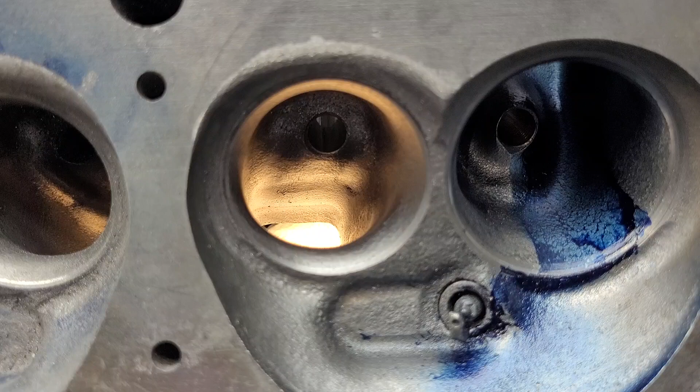Alright guys, this was actually supposed to be on the last video, but the pause button got me, so it didn't make it. This is the bowl ratio with the exhaust. You can see there's not nearly as much overhang as, let's say, the fin port has got.

So the bowl ratio has been opened, and it was nice what happened when you open up the bowl ratio. You can actually give it a bit of a short side radius, which is a big help, because this port was down quite a bit as far as CFM from the rectangular port. This is the quicky port, which has got the trapezoid shape. If you look all the way down.

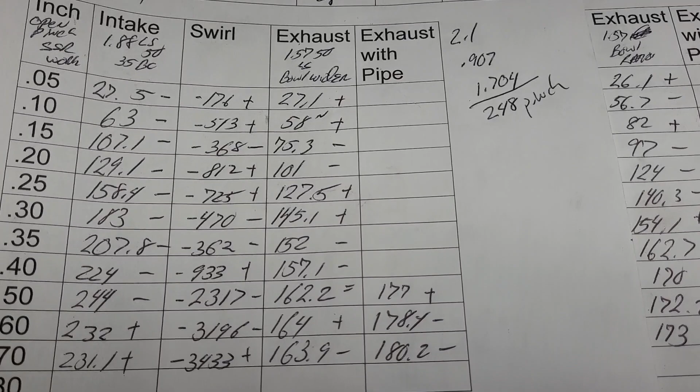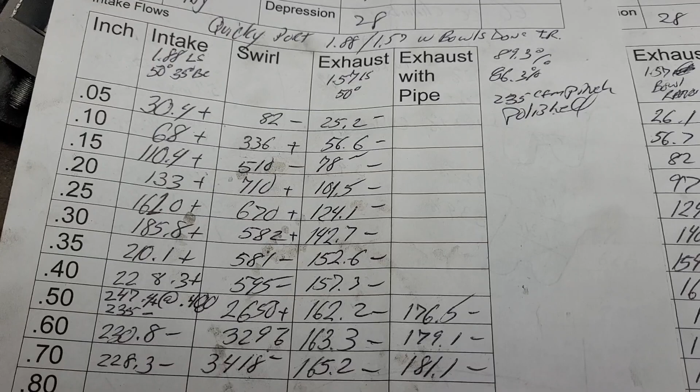All right, let's see if it liked the bowl ratio change. This is the Quicky port. Hold on, sorry about that guys, I mixed that up. Okay, this is the Quicky port with the numbers that went into the IOP program that you saw last time.

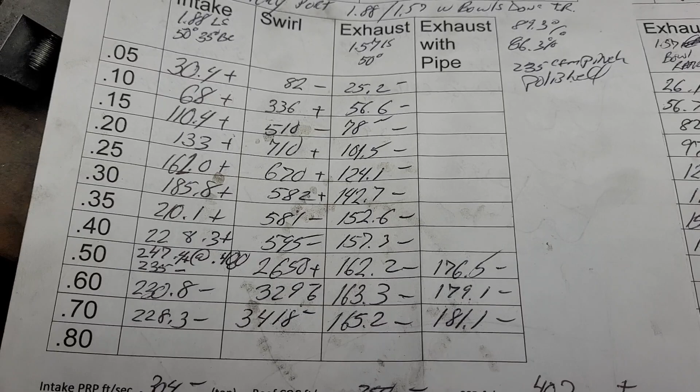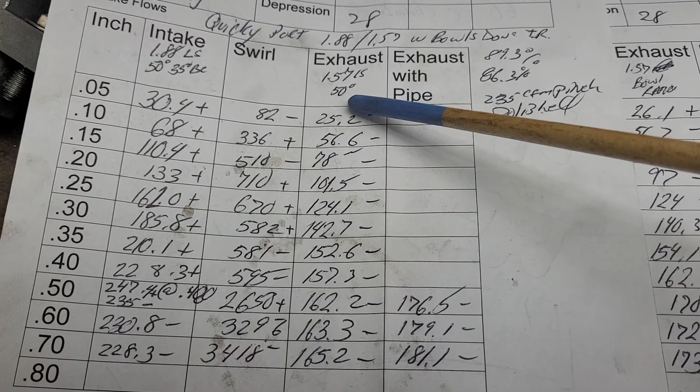Now this is the exhaust flows that you saw when I went to 50, right? This is the 1.57 LS valve with a 50 on it. These are the flows with the pipe on it. Okay, these are our speeds.

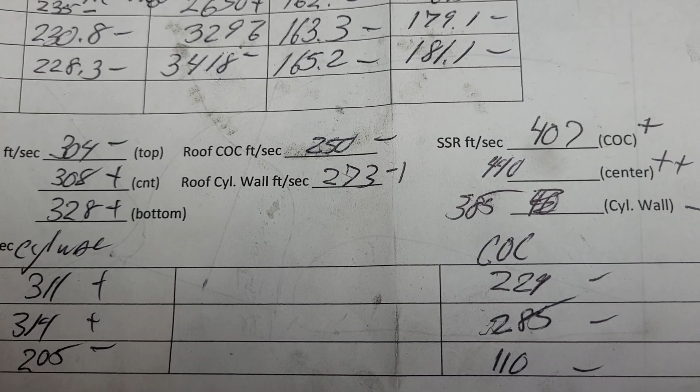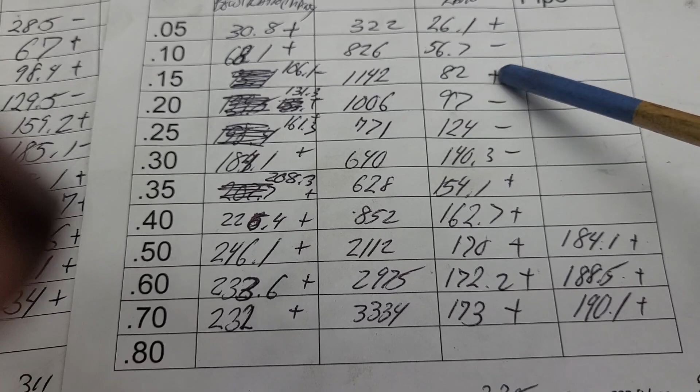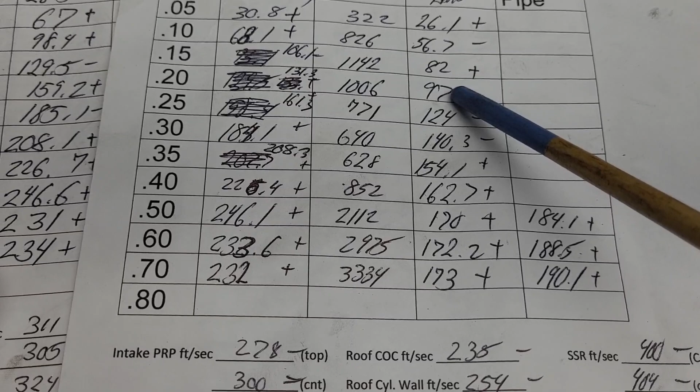So how did we do as far as changing the bowl ratio? We got plus, minus, minus, minus, which kind of stinks right in here, but there's a decent amount of turbulence where the air is coming off the short side and going up to the top of the port, and then it cleans up and makes nice flow from here on up.

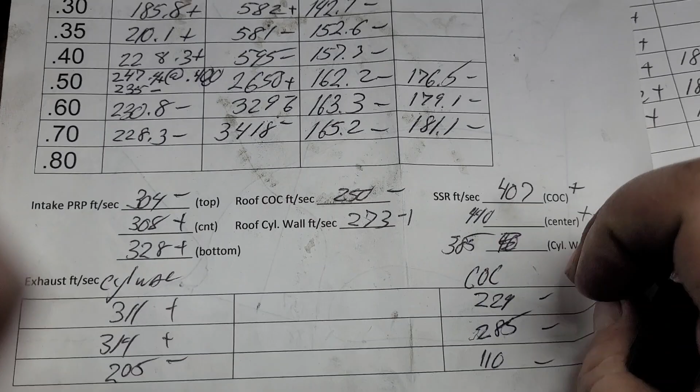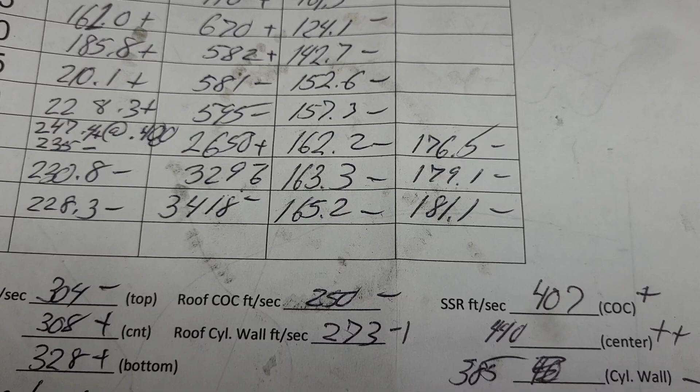Take a look at the difference between these two. All right, the last four flows here - noticeably up, and through the pipe, noticeably up. Let's take a look at our speeds.

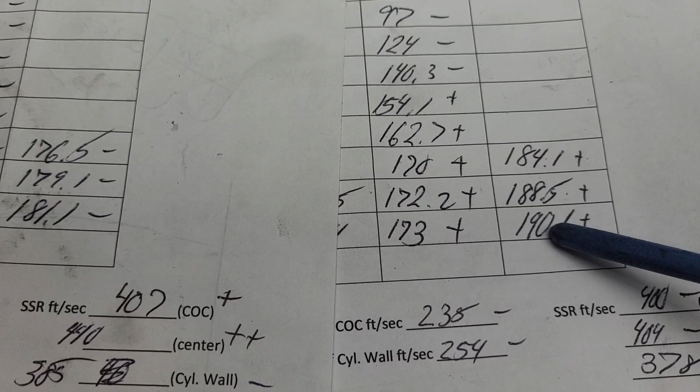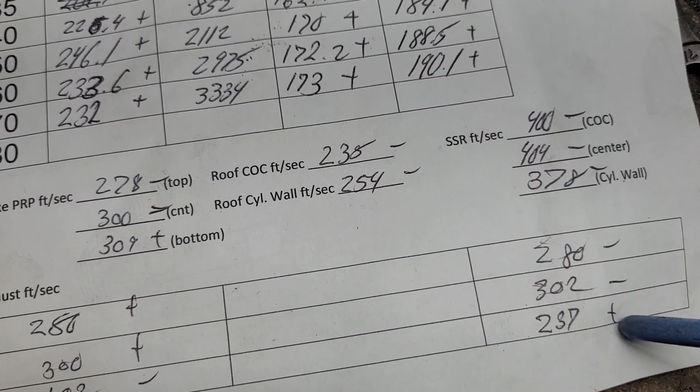These are in reference to the last one. Okay, plus, minus, plus. Overall, this is much closer to the finned exhaust port. Let's take a look at that.

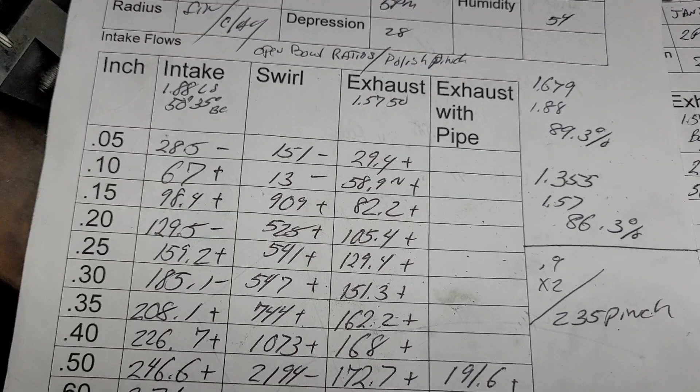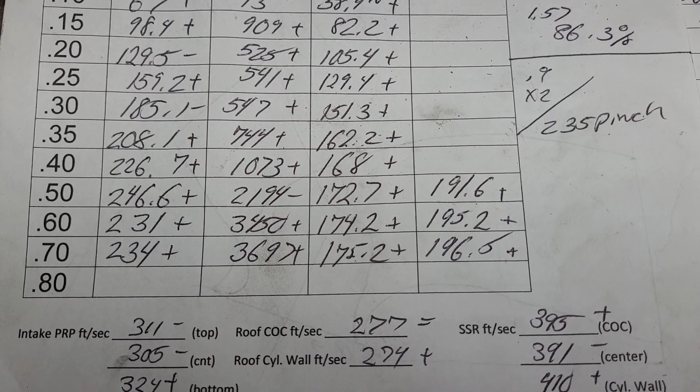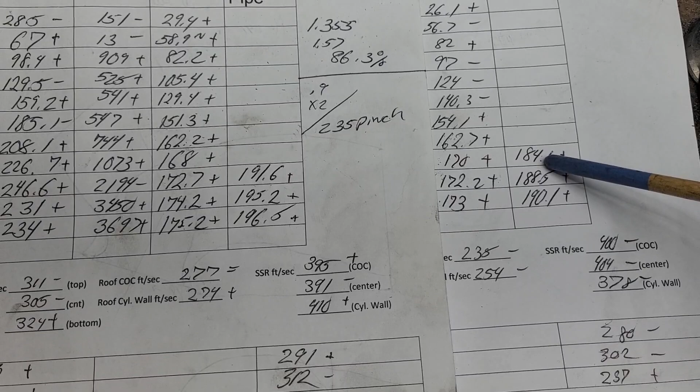Okay, these are the finned exhaust flows that are in the IOP program. If you take a look here, 172, 170, right? A lot closer. 174, 172, 175, 173. Not quite as good through the pipe. It's not as efficient an exhaust shape, so, but it's a lot closer. It's a lot closer to this.

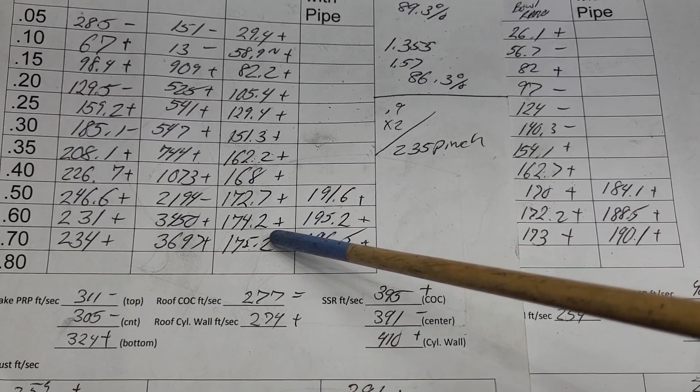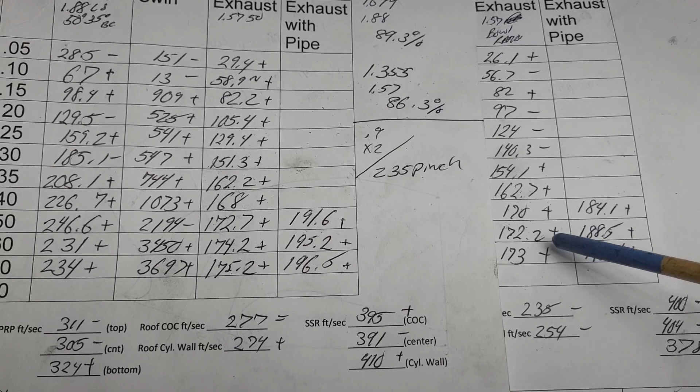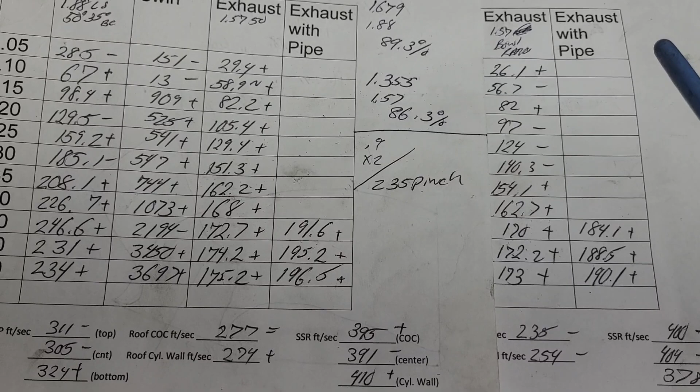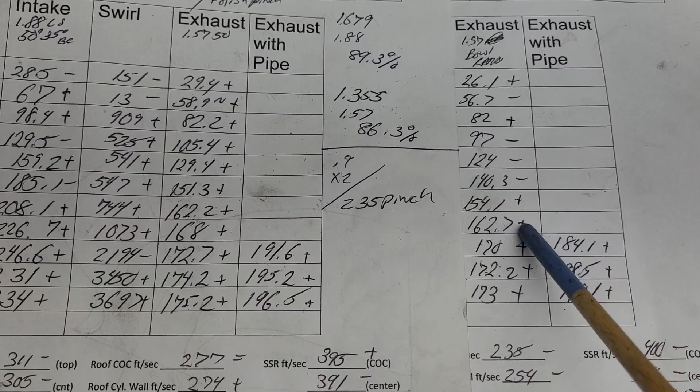Now this has got the very tight bowl ratio on it, but it still works really well. This has got the opened up bowl ratio, and it helped a lot, probably due to that terrible short side radius. So what I would probably do is do these ports with the tighter throat ratio versus these ports, and they're very close as far as flow, and I think they'll be better that way.

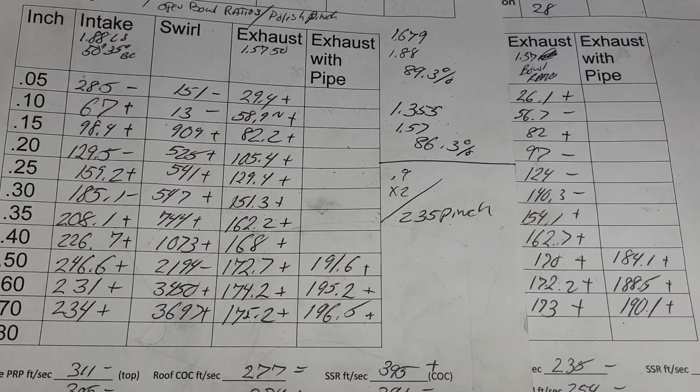Okay, I actually dug the other 302 head out of storage. It seems to be in the same state as the other one was in. It's got bronze wall guides in it. It looks like I did a rough out on the valve job ages ago. You can see it's got some rust on it from sitting around for years.

I actually may have taken more out of those bowls than I probably should have. I did notice the quickie port in the exhaust has got a little bit of a thin spot in one bowl. It's usable, but thinner than I would like. Of course, once it's thin, there's nothing you can do with it.

You know, you could - I know one guy who puts gas tank sealer inside the heads. He even does it if he blows a hole through it, and it works. There's all kinds of things you can do, but that's not really my style. I'd rather not blow through, to be honest, or make them too thin and have them crack.

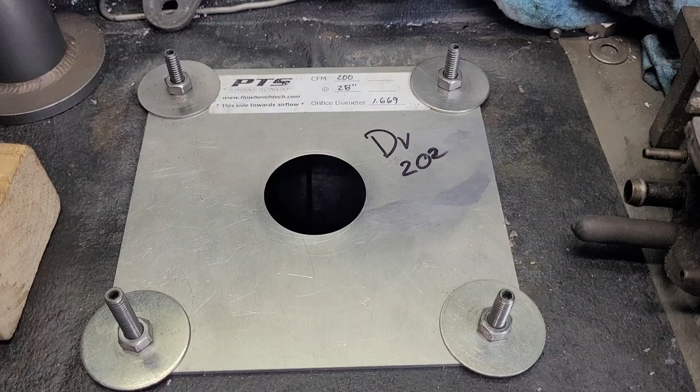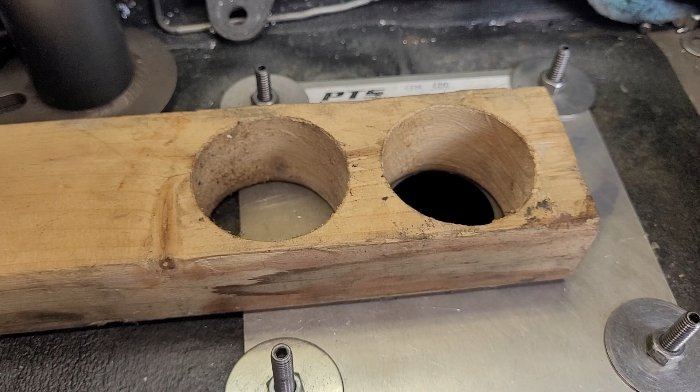Doing some work on the bench. Right, here's my 200 CFM plate. I'm good as far as my calibration, I haven't had to change any of that. But I think I'm going to do a little experimentation. I mean, silly, right? I've got this - this was drilled out for a TPI throttle body, 58 millimeters, just to do some testing.

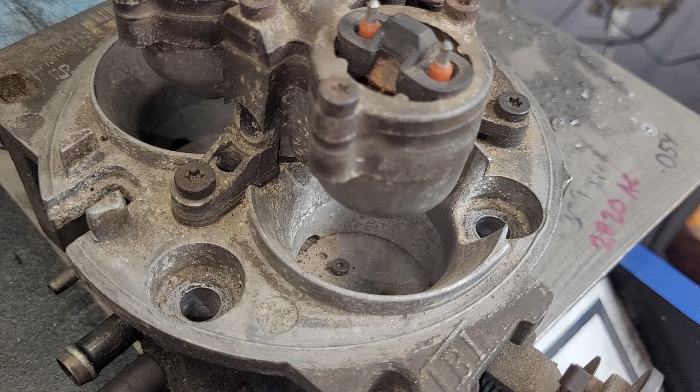Because you have the throttle assembly, it's down further than the mounting plate. Now this is the GM 5.7 throttle body injection Rochester. I thought it flowed 350, but now that I think about it, I think it's more like 500. And I realized that because...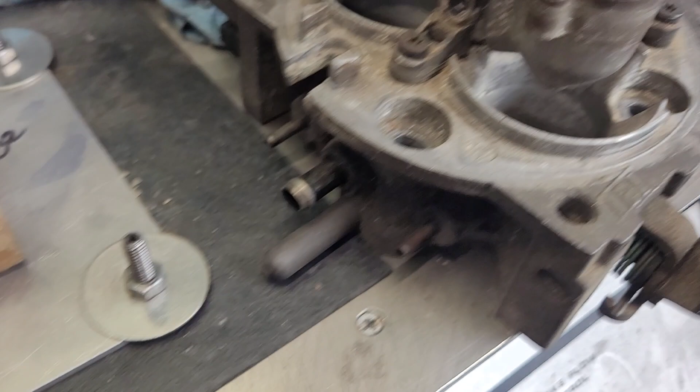We're going to go over this, but it's interesting. We're going to do a couple different things, and it's just going to be simple airflow experiments with the bench. The whole premise is trying to get ahead of the curve with that dual plane 2-barrel 318 manifold that's coming. All right guys, thanks.